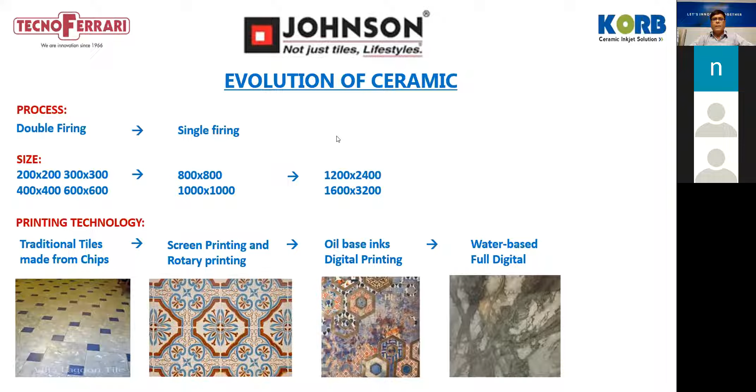Okay, okay, fine. Thank you, sir, please carry on. Yeah. So please mute the phone.

Okay. So if we are going digital, we should know what is the digital technology. The definition that I am going to share with you is not the 100% right definition, but I would like to say this is a layman's definition. In simple words, any technology that is attached with microprocessor or electronics can be considered digital in layman language, or anything that can be captured in memory and transformed, treated into various forms when required, can be considered as digital printing.

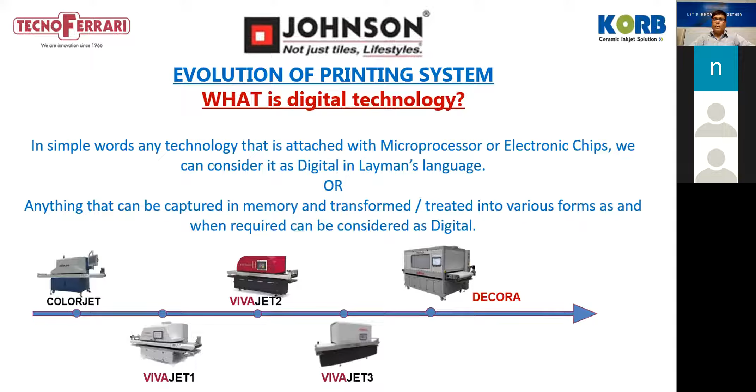So in the below graph, you can see the digital evolution of Tecno Ferrari. Tecno Ferrari is now on the 5th stage. So first was ColorJet, then VivaJet 1, VivaJet 2, VivaJet 3, and now the latest one is Decora. So I would request Mr. Fabio from Italy, Tecno Ferrari, to take over the session on the print heads used for digital printing. So over to you, Fabio.

Yes, hello, good afternoon to everybody. Thank you for joining the webinar. So all of you are from ceramics. All of you know very well that there is more technology available for printing. There is XAAR, Seiko, Dimatix, Kyocera. Then we didn't nominate Toshiba, but these are the 4/5 technologies available. And what I want to show you is how this technology is changing by the time.

Looking from the first one, XAAR, which was the most popular from 2010 to 2015, where they designed the printhead with 2 rows, 7 centimeter. Coming to today, the printhead suppliers start increasing the number of rows and the dimension of the printhead. So Seiko doubled the rows, from 2 to 4. Dimatix 8 rows. Then Kyocera, the latest technology developed for ceramics, designed the printhead with 16 rows.

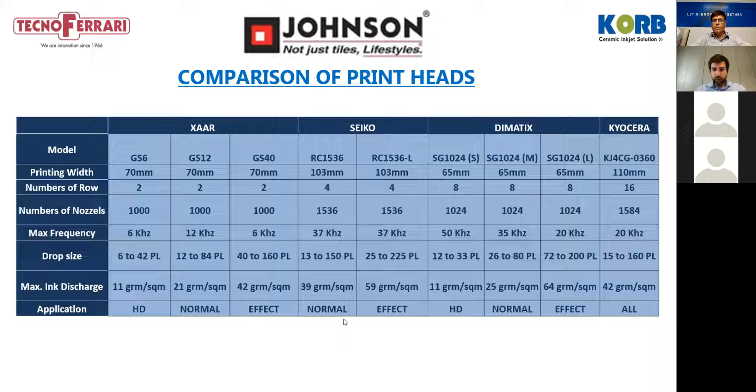Then we included also Seiko. Now we can supply the machine with Seiko also, in order to give more possibility to our customers. New machines will be able to run with 3 technologies, while previously it was not. I am going to show you another point about printing. We can go ahead, Shailesh, please. Those are 2 videos showing the design of Kyocera. Okay, you can start.

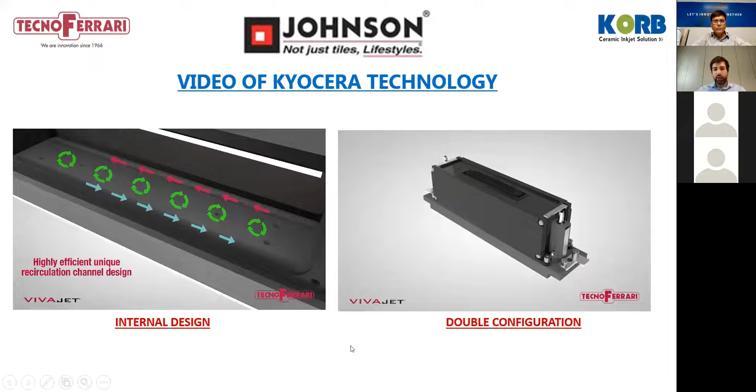So here the recirculation is at the level of the nozzle. For this technology the degasser is not required like it is required for others. There is a technology patented by Kyocera, extra thin piezo, ETP, which allows our customer to keep the production running without the necessity to stop the production for purging sessions, thanks to extra thin piezo technology.

So we always push the nozzle in order to keep it clean. If there is any contamination touching the nozzle, automatically the printhead, by pushing, will clean it. This is one example.

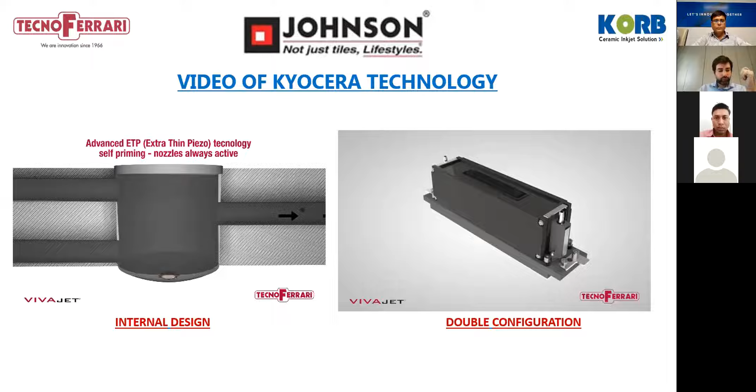Okay, then we can start the second video, Shailesh.

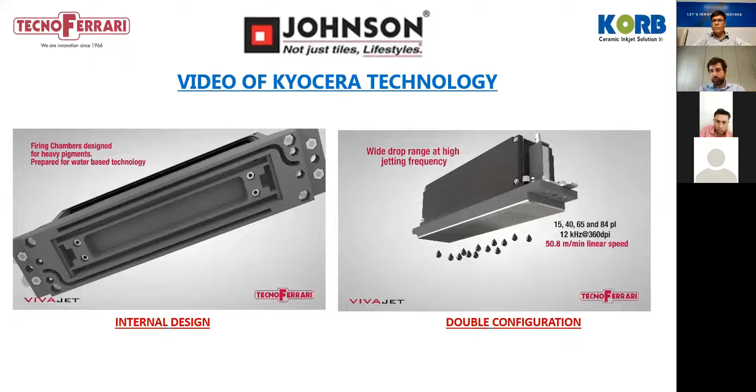Here we are showing the 2 configurations. So with the same printhead, as we said previously, with the same model, we can run up to 50 meters per minute for decoration. The range is from 15 to 84 picoliter, 360 dpi. The same printhead can run with 6 kilohertz up to 25 meters per minute, 160 picoliter.

I think the video is not running, Fabio.

The nozzle plate is made of metal, so very robust, for lower maintenance.

Again, Shailesh, try to. Yeah, can you please mute your microphones?

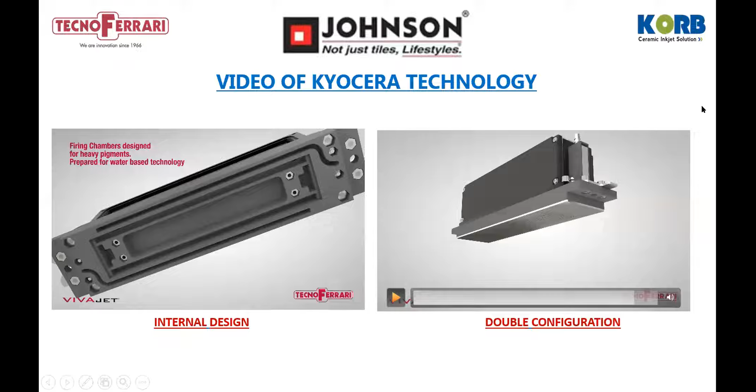You can go ahead with the video, Shailesh. There is the last part showing the nozzle plate with the number of nozzles. It's not running. Yeah, some technical problem is there, so we'll go to the next slide, I hope.

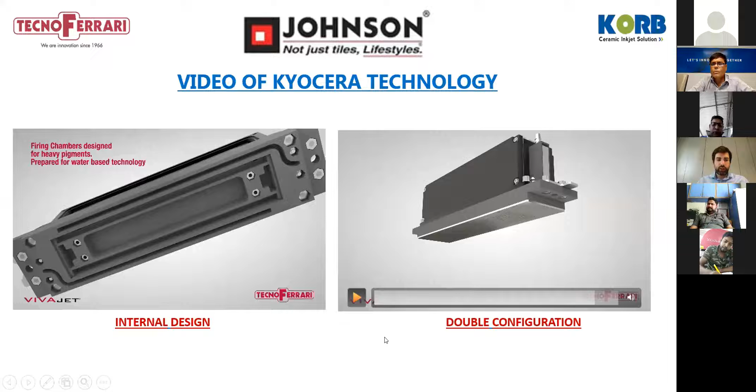Yes, anyway, the last part of the video was showing the nozzle plate, which is made of metal. There are 16 rows with 1,584 nozzles. So you understand that previously, for example, with Xaar, the technology was printing a design with 2 rows. Now we have 16 rows printing the same design. So we stress the printhead less, we limit the typical issues coming from this technology, like dropping and lining issues.

Then now there is the last slide showing the printing quality. Yeah, 1 minute, 1 minute. Just going to that slide. Last time we asked. I will share the screen again because it is giving some technical problem. Shailesh, can I open from my laptop? Yeah, sure. I share my screen. Okay? Yeah, you can do that, no problem. You can see now my screen. Yes, we can see your screen.

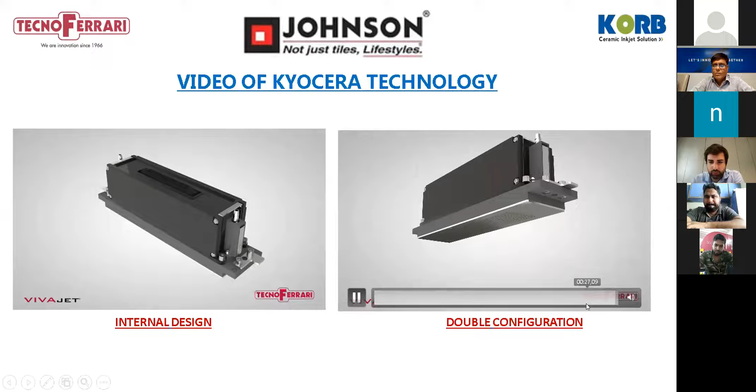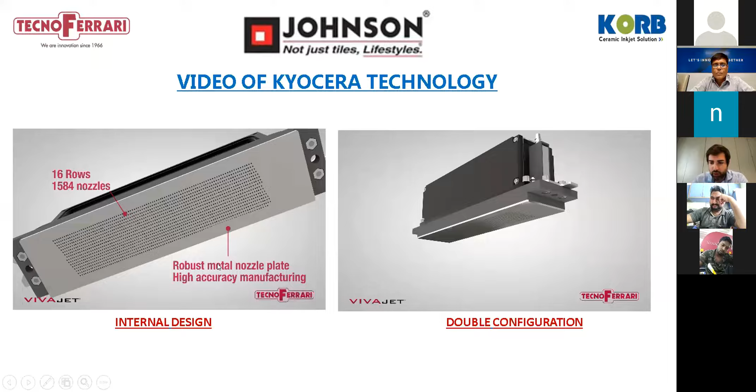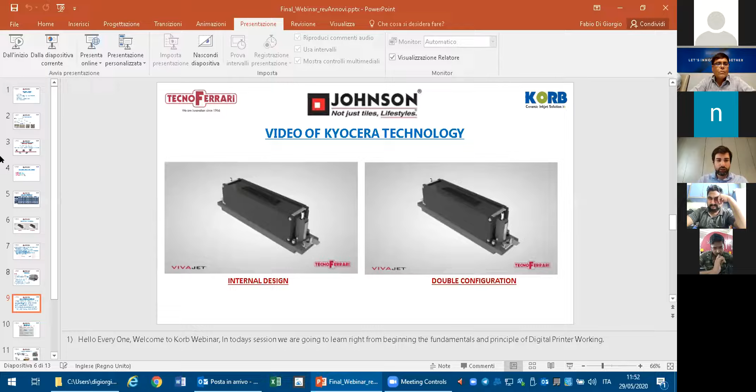It was in this way. Here we are showing the nozzle plate, as I said previously: 16 rows, 1,584 nozzles, and nozzle plate made of metal. Then we go ahead. The DPI of Kyocera, like Xaar and Seiko, is 360 DPI nominal, while with Dimatix they are 400 DPI.

Okay, but what I want to say is that apart from DPI, it is very important to consider also the number of grayscales which the printhead can release to the user. In case of Xaar there were 7 grayscales. In case of Kyocera, 5 grayscales. So optically, what our eyes will see on the tile is an optical resolution of 805 dpi. While with Dimatix, for example Dimatix M, 400 dpi with 4 grayscales, the optical resolution is 800 dpi. We can say very similar.

But you can see below that having the smallest drop of 15 picoliter, compared to the one of Dimatix of 26 picoliter, if you're going to print a light design, a marble design, you can see the difference of printing with a technology like Kyocera or with a technology where the nominal drop size is 26 picoliter. Here they are printing fewer drops but bigger, while here we are printing more drops but smaller. So we are more defined.

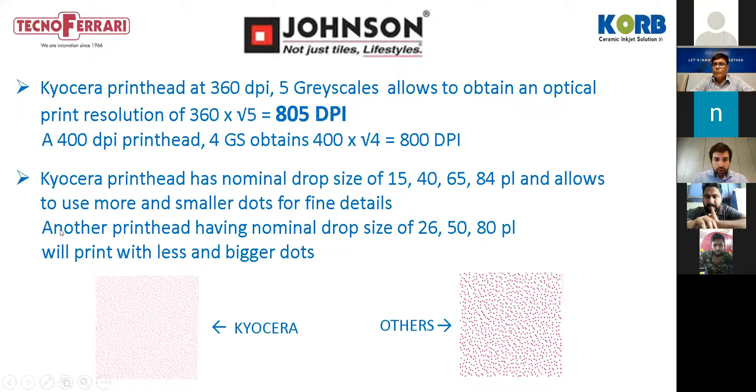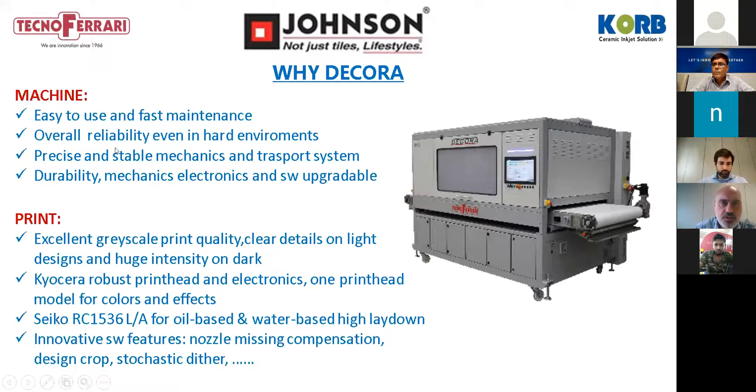So Fabio, we are already at 26 minutes. Yes, now is the time of Alberto Annovi, our R&D manager, who will explain better and in detail what the advantages of the new machine are. Okay. Good afternoon to everyone. We'll jump to another presentation, just in the next 10 minutes. Okay. Are you able to see the presentation now? Yes, we can see.

So, gentlemen, apart from all the technical features that my colleagues explained regarding the different print technology that we have, let's try to look at the new machine that Tecnoferrari has presented from a different point of view, your point of view. Let's focus on the real advantages in line that you can obtain from the printer. So we'll focus on the print strengths and the machine strengths, okay?

So one of the real advantages of having our print technology is to obtain an excellent grayscale print quality. So with small drops, with small shades and stochastic screening, that is the RIP feature, what you can print on such big slabs has a very excellent grayscale quality.

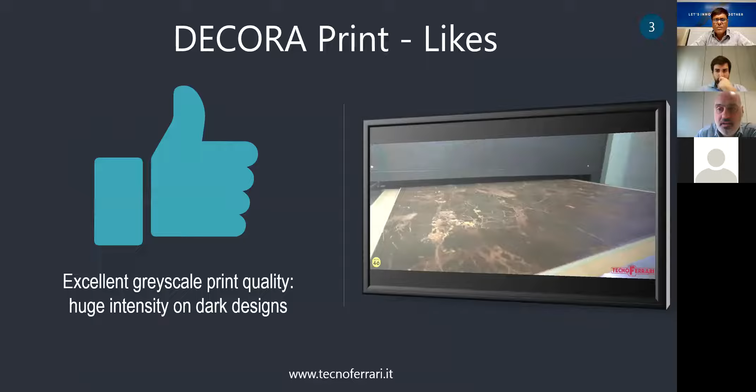But with the same printhead model, on dark or very intense designs, with a 16 rows channel, having several drop sizes and the usage of the new intensity inks, you can obtain very stunning colors and good intensity even on big slabs, which implies having a very high flow rate.

Another feature is that the printheads and electronics that we offer are selected to provide high manufacturing quality and robustness. In particular, we have high accuracy in the optical alignment of the printhead inside the print bar. We use only printheads with insulated piezo technology. These allow a very long-lasting piezo life, so for you, billions of square meters printed, okay?

We use only electronics with low voltage cards, meaning that you don't need to be aware of spikes or whatever can affect standard electronics. We use only industrial connections, no weak connections, and all the software and firmware is developed internally and tested internally before shipment.

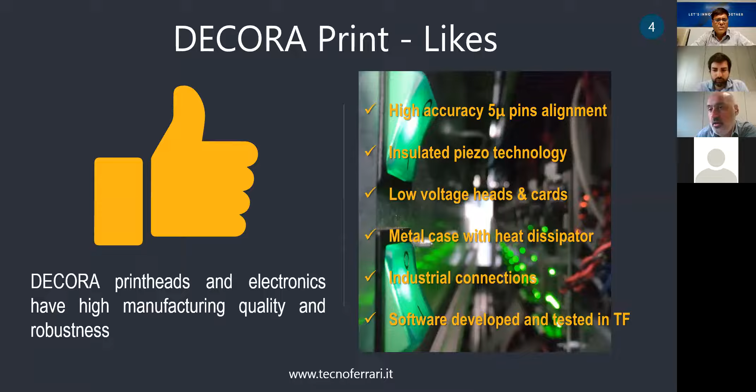If we focus on the Kyocera technology, we can see mainly the benefits: it is a 4-inch class, so a very big printhead means less complexity within the bar, fewer printheads, fewer cards, less cabling. There's a stainless steel plate; it is the 2nd generation printhead. The project started in 2016, so after 4 years and many printers installed, we can consider it a mature technology. It's something that we know very well, and our customers have also tested it very well.

In the same head, we can manage colors and high discharge effects. It is a head that can run at very high frequency, but also have several drop sizes. One of the key performances is a drop velocity of about 10 meters per second. This allows very precise jetting, and even for structured dies or if the print height is not very low, you can keep the print quality.

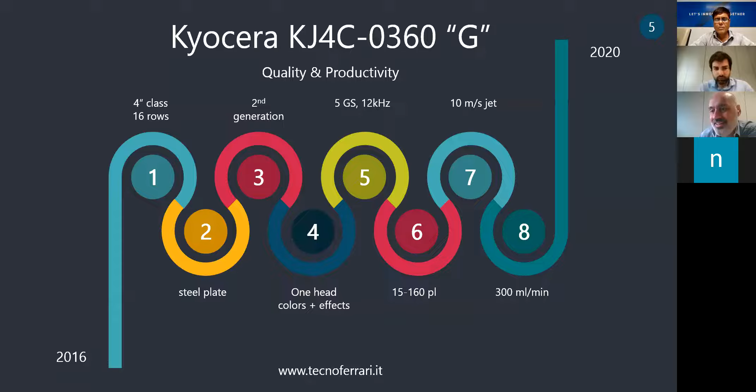Moreover, this printhead has a very high flow rate, something like 300 milliliters per minute, which is actually the highest flow rate available for an industrial printhead for ceramic. Apart from Kyocera, we can now add the new Seiko RC1536-L/A. This is the second generation Seiko printhead. It's not the standard one. It has been improved with many modifications in order to give more robustness for the industrial environment.

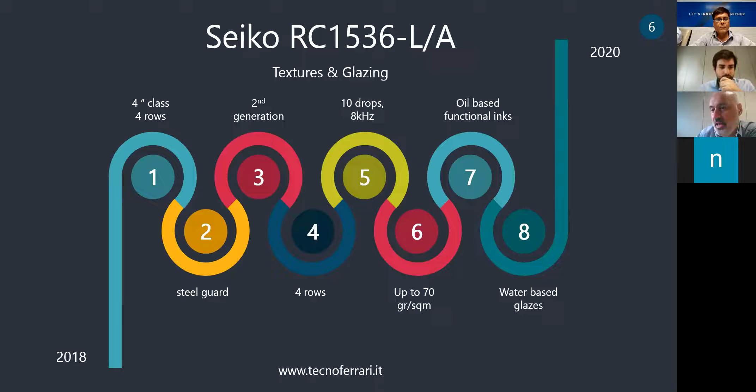This printhead is still in a steel guard. It does not have the same robustness as Kyocera, but it is capable of giving proper reliability in production, even for the new water-based glazes that have a very fast drying time. So by mixing the two technologies, we can obtain a very flexible printing mode. You can reproduce an extremely wide range of products and designs in a hybrid way, by mixing analog and digital techniques, or even full digital.

One of the examples is big slabs, in which you can run from very flat and light designs up to very dark, intense designs, both from a colors point of view, or effects, or even grits for obtaining very shiny surfaces. But with the same technology and printers, we can print some standard.

Anyway, your mic is muted. Yes, I cannot hear anymore. Yeah. Someone muted me. Okay. Can you hear me? Okay. We can hear you. I don't know which part of the speech you missed, but I think it is quite clear.

So apart from big slabs, you can smoothly run floor and wall tile production, both big size or small size, in single or double row, and from light design to very intense and flat design.

But also with the same, sorry, but my presentation is now locked. I don't know. Okay, I resume.

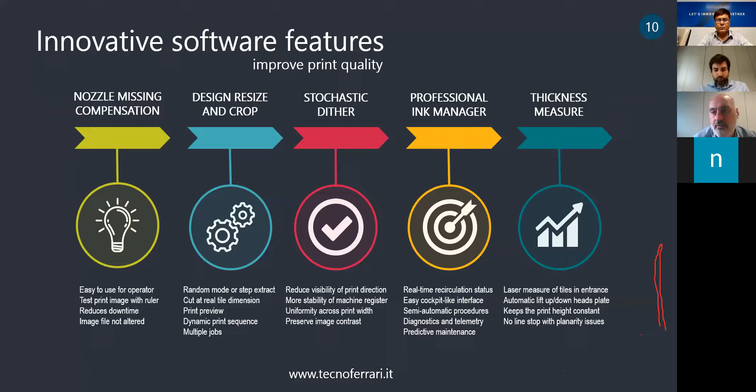We also have a professional ink manager that will allow you to keep the ink inside the printer steady, in particular for temperature and viscosity. And we have a laser barrier in order to measure the thickness of the tile and keep the print height constant.

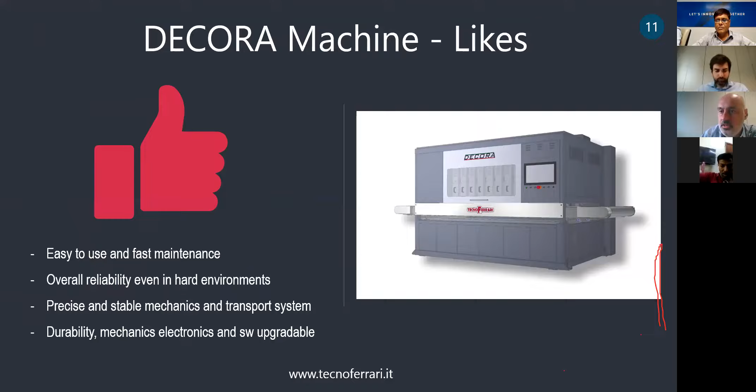So let's see now, apart from print quality, what are the likes of the machine itself. It's easy to use and we have fast maintenance. There's overall reliability even in hard environments; we worked a lot to obtain precise and stable mechanics and a very stable transport system. We also consider your printer should be long lasting, so we provide upgrades, mechanic and electronic options, in order to keep your printer modern.

So the easy-to-use aspect runs through an intuitive interface for the operator with a visual approach. For the inks, you just have a button for the global start procedure, so you don't need to go deep into details of many parameters—the software will do it. You have wizard-like support for taking your images into production, and a simplified view for line operators.

So if you don't want your operator to access something, you can protect certain features with a password. You also have a print preview with the main job parameters, so before putting a job into production you can see the ink consumption or other important parameters to consider before starting.

Any alarm or warning is provided with online help, with text and pictures that will help your operator recover production or solve any problem. We have backup and recovery of printer data, which we can do remotely most of the time. And with our UPS and safe shutdown procedure, in case of a blackout, you will not lose a drop of ink.

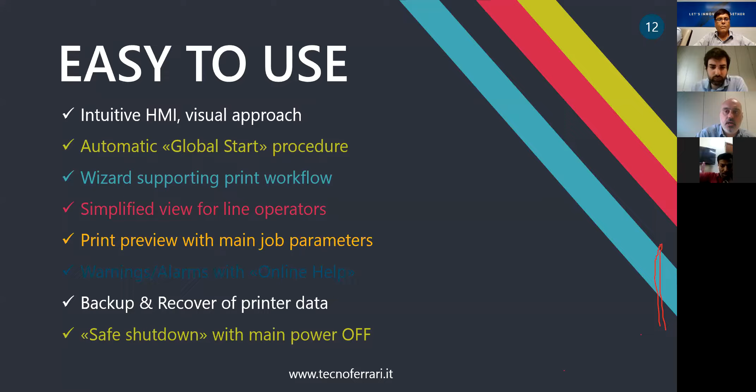Even for fast maintenance, we worked a lot and introduced many improvements. All color bars are extractable, but most of all your operator will appreciate the possibility to look immediately at the components inside the color bar without unscrewing or removing any part. There's an automatic belt cleaning system and even internal roller cleaning with a brush.

Color modules are modular, so they're easy to repair and replace. You can take one out, and in most cases with just a plug-and-play operation, you're able to restart, and our service will be in charge of repairing it. You have fast connections for filters, so replacing filters and even the print belt will require less time compared to previous versions of the printer.

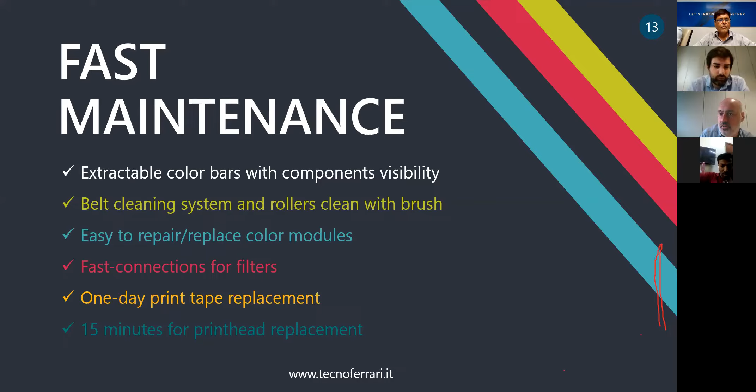And you can replace a printhead physically in 15 minutes—you don't even need to do an ink shutdown. Also, reliability has improved. We consider our printer reliable; maybe all printers are industrially reliable, but not all in a hard environment like ceramic plants.

So to achieve this, we have an automatic standby mode. No matter if your operator is not present on the line, when production and the line are stopped, the machine automatically puts itself into standby mode to preserve printhead and inks, which are protected by trays. Even printhead plates are provided with a heating system and adjustable suction in order to reduce condensation, misting, humidity, and anything that can contaminate the printhead. There's also a sensor that measures the tile temperature.